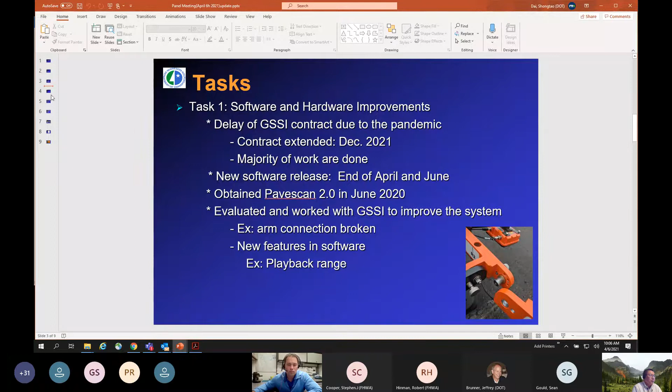For task 2, that's the development of the actual specifications. Like I mentioned before, we drafted up the puck calibration and field data collection procedure last spring, and also produced the training videos based on the 1.0 device. Since we got 2.0, we updated the video portion and the laboratory calibration portion a few weeks ago. The video is uploaded onto the DPS website, and here's the address, so you can go there to view the puck calibration video. We also plan to update the field data collection video and these procedures using the 2.0 device by the end of May. By that time, we should be able to get into the field and collect data.

From a data collection perspective, we continue to hire contractors to collect data for us. This year we are going to try a new program called pay for the data versus pay for the hour. Previously we just paid the contractor by the time spent collecting data for us, but starting this year we're going to tell the contractor to get the equipment by themselves, and we'll pay by the amount of data. We'll give you a spec and a data format spec, and you need to follow this spec to collect the data for us. Then we'll pay for the amount of data you gave us, instead of paying for the hours you spent collecting data. Previously we also loaned them equipment, but from this year we're going to tell them to get equipment themselves, either through rent or by buying it. The encouraging thing is one of our local contractors already bought equipment, so they're playing around with it themselves right now. That's very encouraging to us.

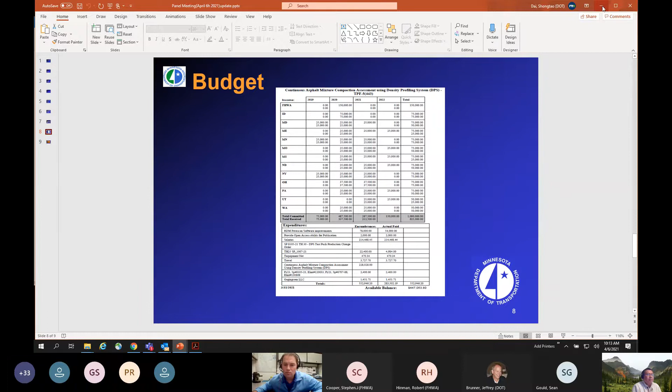Can you hear me all right, Di? Yeah, I can hear you. Okay, yeah.

Kyle asked for a quick update on what Federal Highway has been pursuing. Hopefully most of you know Federal Highway has a support contract with QES to support DPS activities. The last major event they hosted was a DPS peer exchange at TRB last year, and the next activity was to support a DPS implementation planning workshop.

We were putting this on hold for a while as we dealt with the pandemic, but we finally decided to have it virtually. It's now scheduled for April 20th and 21st, and I know a few of the agencies on the call today were invited to that event.

Some of you might remember during the SHRP2 Implementation Assistance Program for R06C, we had an initial implementation planning workshop in early 2014, but at the time it focused on two technologies: the infrared technology, now the paver-mounted thermal profiler, and the DPS technology. But most of that implementation planning was focused on infrared, just because that was a technology ready to go—not so much DPS, although we saw a lot of potential benefits for this technology.

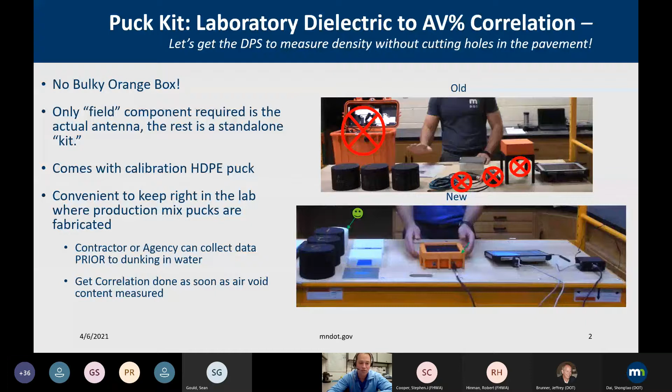I wanted to mention that we get a puck calibration HDPE puck, which is really nice to make sure the sensor is working properly. And it's really convenient to keep right in the lab. What we found, we were able to get our hands on one at the end of last construction season, we just shoot it for the dielectric value before it even gets dunked in the water. So if you have one of these kits on site where the production mix is being made, it's pretty quick to just get your dielectric measurement, and then as soon as you measure the air void content, you have your correlation between dielectric and air voids.

One thing I wanted to mention, we got some feedback from states with bias between lab correlation and what we see in the field. We're looking at numerous things to address this, and one of them that we're on right now is just really the importance of getting a precise height. So please, when you're doing these puck tests, as we say in the fabrication video, what we're advocating right now is to use the gyratory compactor readout as your puck thickness. It's the most accurate, we think, for the height of the puck itself. With a caliper, it's just a little bit too sensitive to pressure, and depending on who's doing it, you can get different readouts. The reason that's important is even as little as a millimeter error is almost a full tenth of a dielectric, which corresponds to a full percent air voids for most mixes. So that's one thing, remembering to use the readout from your gyratory compactor for the height.

In the lower right corner you can see a puck thickness measuring device, and we're going to do some in-house testing with that just to make sure that this gyratory readout is a good way to go. It's also good to have a way of checking to make sure that the gyratory compactors are calibrated, which I believe most states they're required to be. So more to come on that.

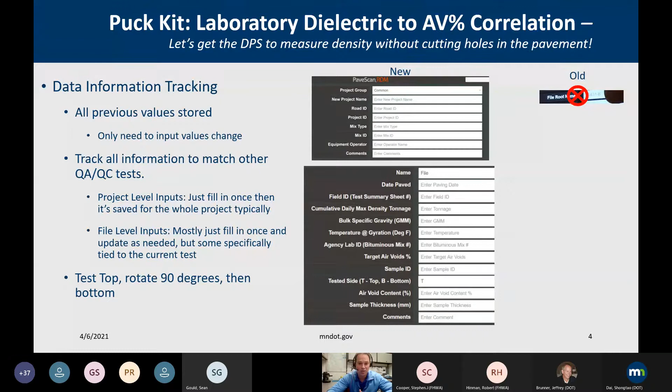Another thing I'll mention right now is we're advocating doing a top, rotate 90 degrees, and bottom test with the puck, just to make sure that there's no effects of where you are on the puck in case there's some sort of a compaction gradient within the sample itself. But again, that's in the video, so keep your eye out for that.

Also, one thing we found with this new puck testing kit, for those of you who did the first 1.0 version, you kind of had to be a ninja a little bit with the samples and make sure you got everything flipped and switched and changed within a certain 5-second time window, and that of course leaves a lot of room for error. With this new puck testing kit, it's very simple.

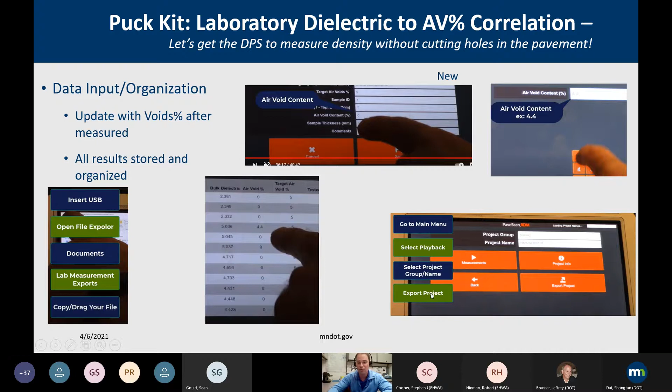And again, no more executables on the processing, you have the results already to go. In this case, once you go into your specific test, you just take the calibration results for a linear correlation between dielectric and air voids, and you should be ready to go with your field testing kit.

This can either be done directly in the software to get the correlation coefficients, or we will provide a little template we've built in Excel, where basically if it's green, that means you can paste data.

Again, it's just a simple copy and paste from the exported file that contains all the information you input for that specific project, which we think is a good way to make sure we're tracking everything right.

But in this case, you guys don't all get a car, I'm sorry, but you do get a puck testing kit if you're part of the pooled fund. The only thing the vendor asked is that you share all the data that you collect.

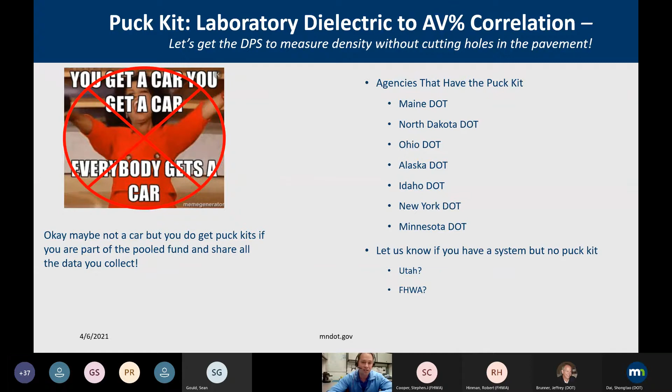Lastly, I wanted to summarize some thoughts and then play a little bit of the training video, and this is where you can go for more detailed information.

Please give us feedback, because we have Camtasia software that allows us to do different editing with our training video, but you can jump to different spots. If you're more interested in the test itself, you can do that.

Just in general with this puck testing kit, we think it's a lot more user-friendly. One way to say it is there's less opportunity to screw it up. And then, of course, you get real-time feedback, which is important.

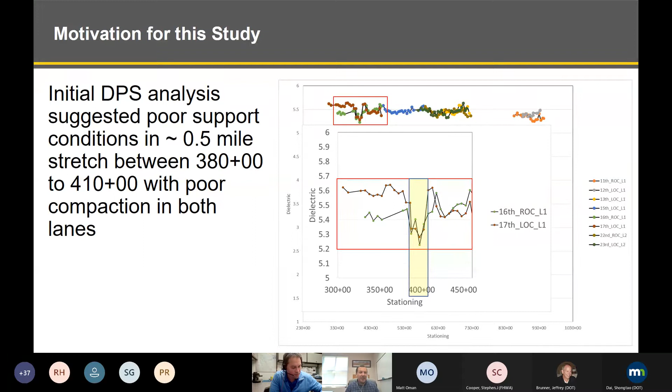Again, I wanted to emphasize the advantage of not needing full coverage. It has to be at least something that can show us that the density changes with distance, and that's something we know we want to take advantage of using this type of technology.

Again, as I mentioned, this was also corroborated later on by checking all the different density results, and what I said before, the standard QA practice did not capture this low density spot, and that's something we can take advantage of at this point. We can take action immediately and come up with solutions right away, instead of waiting a couple of days if you're lucky to find that was a defective area.

With regards to what we're planning to do with this project, the objective is to further advance and improve DPS technology, taking advantage of AASHTO specifications developments. NCAT has extensive experience with equipment and operator certifications, specifically the profile certification that we currently have at our test track facility. The idea is also to use that DPS technology for data collection and analysis of different methods.

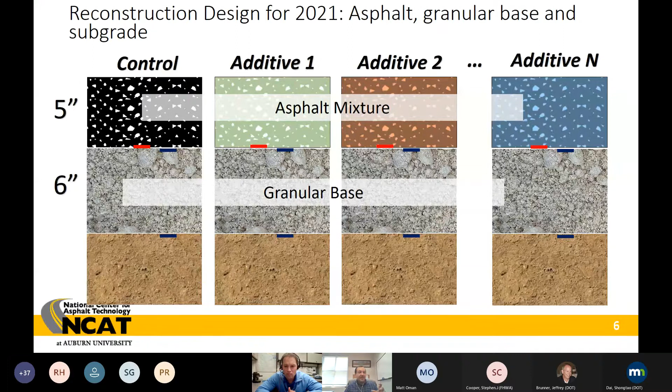By the way, these are going to be placed in one lift. So we're going to have 5 inches all the way down to 1 inch at the track. We're going to be able to separate, again, thin and thick layers at the track as well.

We already started the process of building or creating these slabs. We can do 1 slab per day. The process at the beginning is going to take a few slabs. We're going to test extreme values in regards to thickness and density.

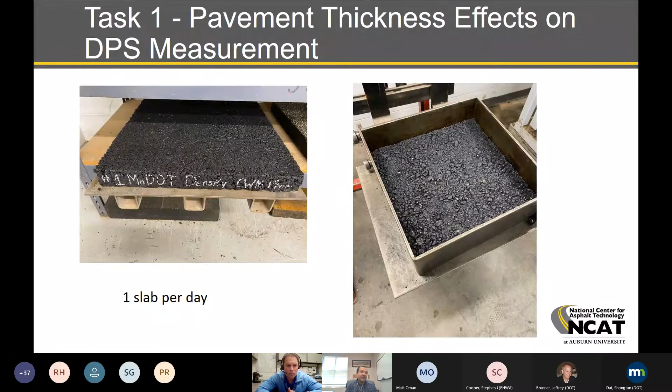As you can see here, the lab testing plan was to have 2 different mixes. One is a 9.5 millimeter nominal maximum size, and the other one is a 19 millimeter nominal maximum size. The plan at the beginning was to have 4 different density levels ranging from 88 to 97% of GMM, but at this point we're going to try to start with extreme values from 88% to 97%.

We're going to have those 2 mixes with slabs ranging from 1 inch to 3 inches for the 9.5 millimeter, and a minimum of 2 inches to 4 inches for the 19 millimeter, basically trying to comply with the thickness to nominal maximum size ratio. So we don't want to go too low, since it's going to be difficult to compact, or we don't want to go too high, which may come up with different effects.

So that's pretty much task 1. Task 2 has to deal with equipment and operator certification, and here we're going to try to reproduce what we have in place with regards to profiling systems.

The idea is to come up with a parallel practice to AASHTO R 56-14, and develop all the different repeatability and accuracy scores, or something similar.

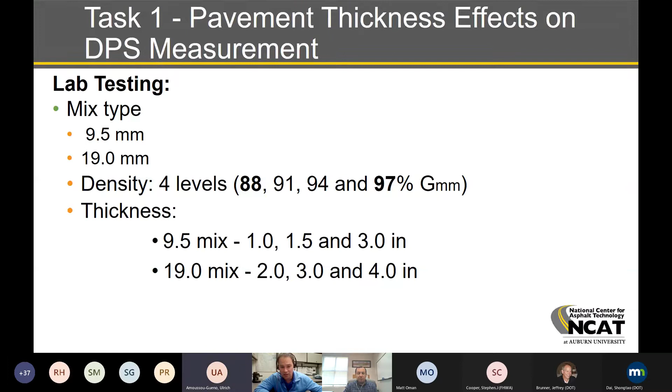Yeah, and another thing to add is that we do have some data collected that hasn't been analyzed yet for the effect of underlying layer at MnROAD, where a 3-inch lift was gradually changed to nothing at a transition zone. So hopefully we'll be able to provide a little insight to support Dr. Leiva's effort there too.

All right, so continuing with task 3. Again, the plan is to use those same two mix types, a 9.5 and 19 millimeter, and also use the same density levels ranging from 88 to 97%. One question I wanted to ask the participants is whether we may want to use Corelock from the beginning.

As Kyle was mentioning before, we plan to measure the dielectric before dunking those samples in water. But if we were to use Corelock, we may be able to preserve that or avoid adding water to the pucks. So that's something we're probably going to do, using Corelock for the samples that we're going to distribute among all the different labs. Of course, we want to know the specific gravity of those pucks, but at the same time, we don't want to add water to those. So I think at this point, Corelock is the way to go.

Later on, we're going to move on to field testing, and we're going to come back with several sections where we take cores and compare the effect of moving from lab compacted samples to cores. We already have an idea based on conversations and meetings with MnDOT that there's an effect. We'd like to see what the effect is on those statements when we move from lab compacted samples to cores.

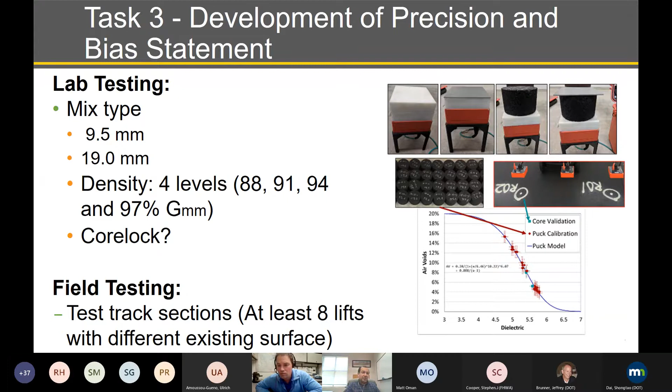At the end, as a summary, I wanted to share the deliverables we plan to provide to MnDOT for this pooled fund study. I think the bias and precision statements are important if we want an idea of the overall variability of the equipment when evaluating lab compacted samples.

We're going to be providing support and evaluation of testing variables in the lab and in the field. All those results are going to be available for you guys, and we'll continue sharing those results. Equipment and operator certification and standard practice.

We have a couple of students helping us provide standalone software. Basically in MATLAB, we should be able to create standalone software similar to what we have for inertial profilers. So once a contractor or vendor comes with a new DPS technology, we should be able to input all those different profiles, compare them to the baseline profile, and there has to be a cross correlation among the different profiles. Then we should be able to come up with a score and compare that against the standard or criteria set from this study.

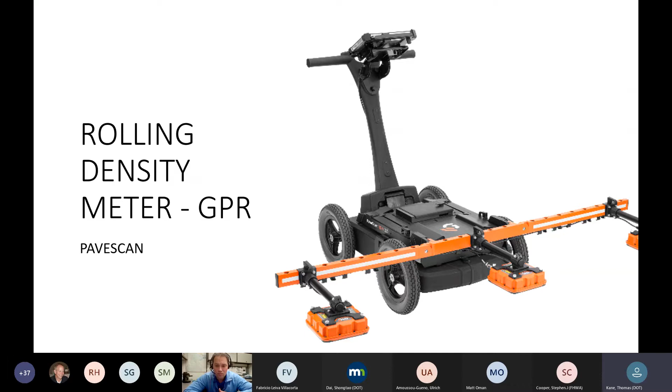Some of these slides will not be news to anybody on this meeting, but I left them in because I think it was important to understand how we're promoting it within the region, or explaining it within our regions of the state.

I felt like we had to talk about the RDM in terms of what we're doing now for quality assurance testing for density monitoring. The cores are obviously the gold standard, but they generate problems from destructive testing to trying to get the tests performed, and we're still getting them infrequently. The gauge lines up a lot closer to the RDM, but I'm really trying to get these guys to appreciate what that data from the RDM can do compared to the gauge.

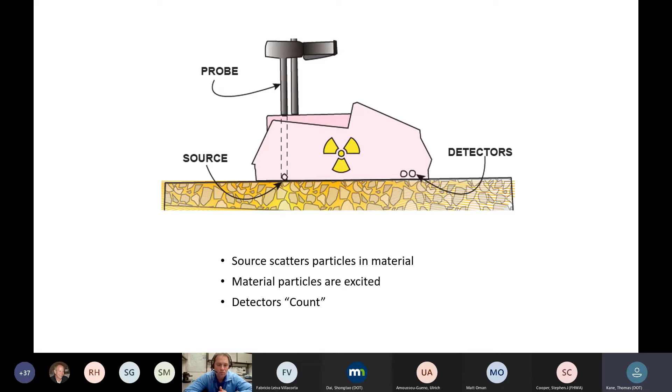Obviously it's a similar technology with a source and a detection, and we just spoke about this in the last presentation with some interference from below, but the results from the gauge - the lower lifts do contribute to those results.

There are other problems with the gauge too. Right now, all of our gauge data is generated on a paper form, which means somebody's doing math in the background to figure out our running averages. There's always the ability for a guy to move a gauge reading to the left or right. So I really want to introduce to some of our construction staff that while everybody's familiar with the gauge, it has its limitations and its own set of issues.

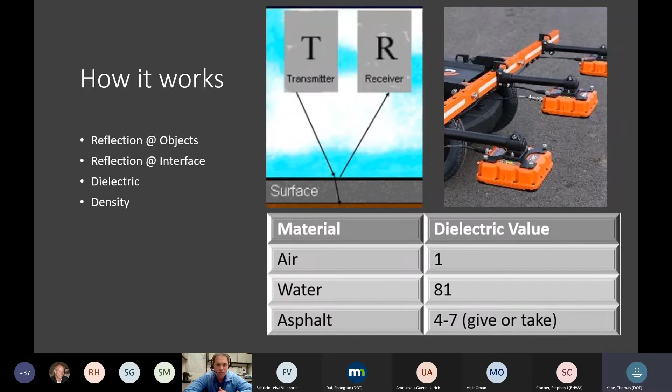Really basic primer for these guys, just to understand that much like the nuke gauge, this is a transmitter receiver type scenario, really basic right there.

Rolling right into that thought, this is, I think, what grabs a lot of contractors and the engineer's attention, is that this is the result that we're getting from rolling over it. It's not going to look like that black and white kind of Rorschach test of interpretation. You get a color, you get a yes or no. This is something that I think a lot of the EICs that we were out with this year were really taken by.

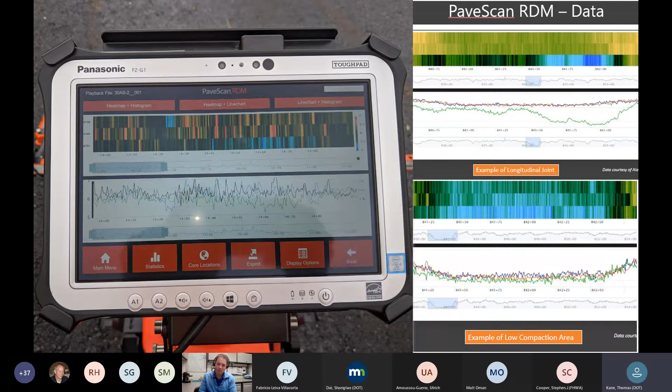And this is something that you can really use to kind of promote the concept. And I'll say that from both our engineers' perspective, our regional materials guys are very progressive. And even a lot of the contractors, they see this, they see the bright colors, and I swear to you, it almost sells itself. There's a lot of interest in where we're at.

Kind of jumping ahead of how we put it into contracts this year, like I said, we ended up doing 3 last year. We took a range. Let me start over. This got inserted into 2 different contracting mechanisms, but our process was still the same.

We still asked for the gyratory specimens compacted at anywhere from 86 to 98. I don't think we necessarily needed to be doing that, but for the first year to get this in a contract and get some exposure to it, we figured why not ask for a little bit more.

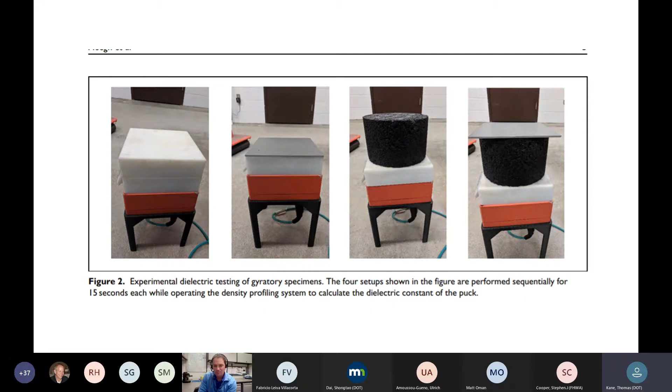Going through with the puck kit, obviously the first time, but this slide, when I presented it to our regional staff, was to basically promote that there is a measurement going on, that those colors that you see on the screen are being derived from something. They don't typically see this, but it's important, I think, for them to know that there is a tie-in.

So here's kind of the first slide of data. This was our first project, taken outside of Utica. First experiment with using the puck measurements, we had some fliers. The slide to your left shows all the data that we had. The slide to the right shows it excluding those 4 points. I really can't explain those 4 points.

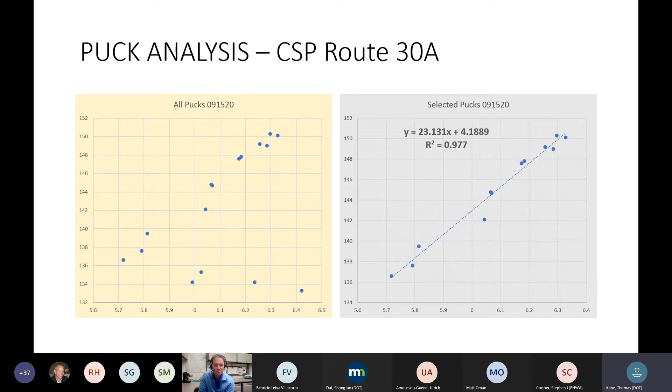This is going to be a common theme with some of the other data that I'm going to present today. I'm not really sure why it happened, but it's pretty clear that there was a flier there for whatever reason. But excluding it, we really get a good correlation with those pucks.

When we did our data collection, just a couple of things: obviously, we did all of our cores with the center sensor. However, we did 2 passes at 1, 3, 5, 7, 9, and 11 plus or minus down the core. So we're getting 6 lines of data, and we'll talk about that a little bit more in a second.

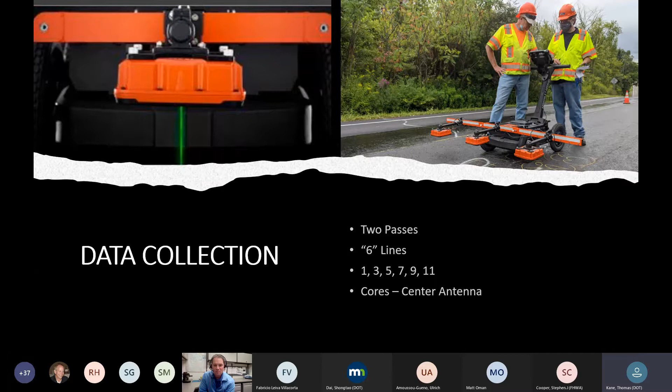But here's the beginning of what the data was. And the core is always going to be shown in pink, and we'll show that on the graphs as well. And then the blue will be the radar information, the orange, the nuke gauge.

I still have everybody? Yep. Sorry about that. Yeah, we're here. Yep.

On this first project, we also had some binder data. The binder data, as you can see here under this delta RDM, we were a little bit all over the place on that first day of data.

I think some of our data may have been skewed by minor production changes at the plant. This specification that we ran on these contracts ran in the background.

So meaning this was just a shadow program to collect data. Their pay and their incentive payments are still based on volumetrics. So there still was an incentive, even though we asked them to not move the targets. Obviously, there's a financial incentive for them to ensure that they are going to get the most incentive payment they can. So there were slight movements. I don't know if that played a role here, but it is a possibility.

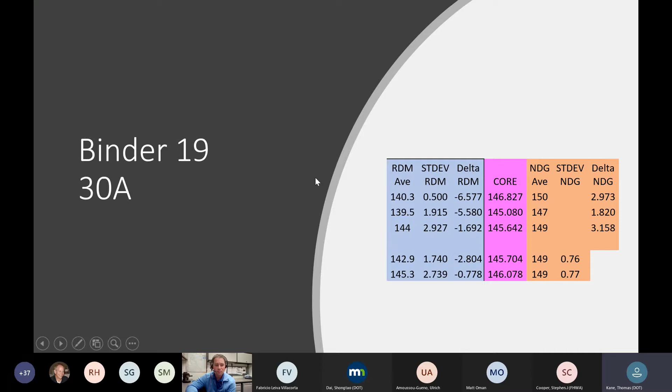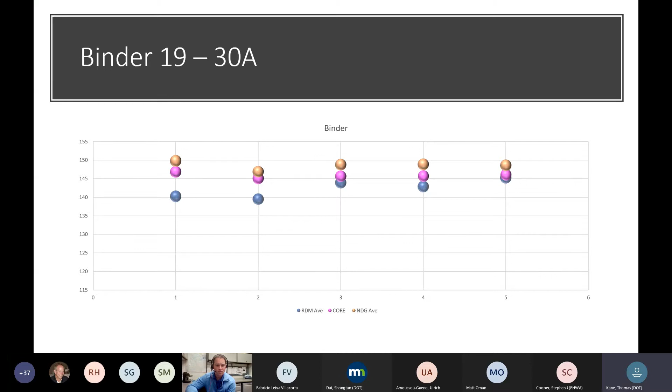Graphically, you can kind of see this a little differently. Pretty tight though. Our binder data actually looked reasonable, particularly for our first day, our first project.

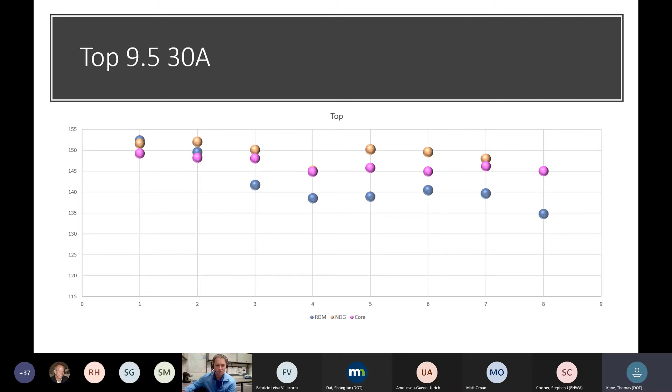145 on our cores, so this is significant. It does seem to trend, as you can see with the data a little bit. The RDM data seems to be consistently lower. The nuke gauge and the cores obviously are a little bit closer, but whatever the reason was here, it was pretty consistent. The longitudinal cores were really the interesting one on this first project.

I highlighted the ones in red where we see the delta RDM, and I apologize, it's a lot of data. I don't expect everybody to really be able to take it all in, but we had some really poor values on these.

The standard deviation was kind of all over the place early on. Seemed to kind of come down as you get down to the bottom of the page here. It seems like we've kind of got them together, a little bit tighter. Our deltas were looking pretty good, but then we would occasionally still get these flyers.

It's important to know too that we also had some big deltas with the nuke gauge on the longitudinal joint as well. I think as we move to this season's work, the longitudinal cores is something that we're going to look a lot more at. This was the only project where we had longitudinal cores and a longitudinal measurement for, but there's a lot here to unpack.

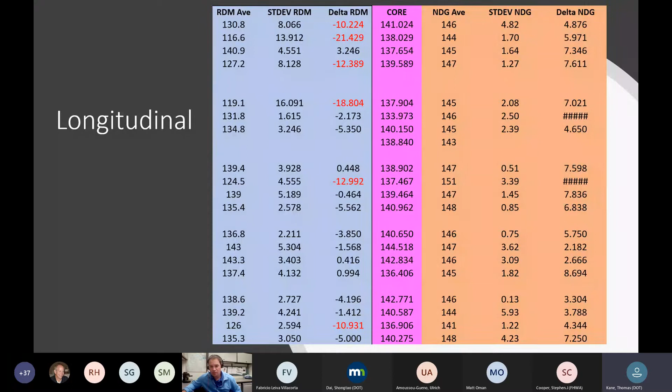Tom, question. So did you longitudinal join the core? Did you core through the joint, or did you take a little bit away from joint? It's a little bit away. So we're primarily using wedge joints, so we're trying to get the meaty part of that wedge. Okay, similar to ours. Yep, okay.

Just more scatter. I think when you plot it, things kind of pop up, but you definitely see that we're a little more variable, definitely early on.

But the one thing I want to keep coming back to is that this was our first shot, our first project out of the gate. I'd like to think of it, I mean, I had 2 little kids. Christmas morning, there's nobody stopping to read instructions. Everybody just wants to go out and kind of take it for a spin. And we definitely learned some things the hard way.

So I think you'll see our data accuracy and our delivery a little bit better as we go on here. The next project, we got considerably better numbers on. This one was a small vendor placed job out in the Buffalo area.

If you look here at the averages, and I should say the differences, pretty close. 2 pounds off, 3 pounds off, 1 pound off, 2 pounds off, really getting good numbers. And really, I thought what was interesting here is how close the standard deviation.

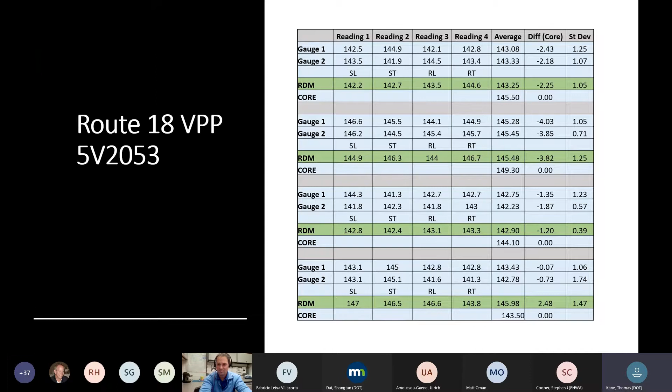Another graphical look at where that data is. I find it funny on day 2 that the core was much higher than both the RDM and the gauge. So I don't have an answer for that. I think it's just one of those things. Maybe that core was a little wetter when we measured it. Not quite sure.

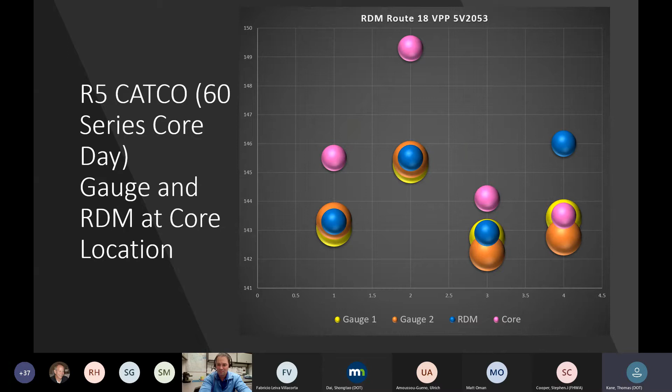Kyle, Thomas, we got a couple questions in the chat. Sure, do you want to read them? Sure. How often did you do a puck test calibration of the RDM during the projects?

So we did the puck calibration early on, and then depending on if we had some changes or if we had some time on rain days, we would do another one during.

And then the next question: are there any time constraints between collecting field samples and fabricating pucks in the lab, i.e. within 24 hours, 1 week, etc.? So we asked to get this mix prior, that was part of the reason we had it in the note.

This is something we're going to set up for our producers and contractors again this year, because we put a note in the contract that they have to make these pucks ahead of time. These are typically commonly used mixes that they have off the shelf. So if they know they're going to be working on a GPR project at the end of June and they're running mix early June, we'll work together and have them make the mix ahead of time.

We'll take those samples, transport them back to advanced testing. Or in our case, as we get our system in shortly, we can test them as well and get those numbers. We try to get that early on because I think that goes a long way with educating the contractor, so they know they'll get meaningful feedback from the unit from day one. They don't have to worry about it going out after the fact.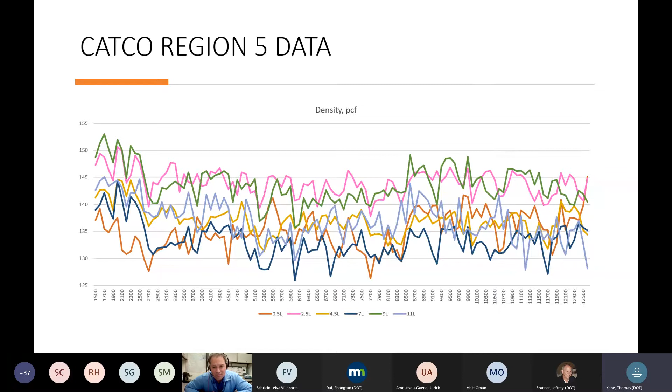Going back to that picture of Christmas morning when everybody's ripping things open and nobody's reading the instructions, we didn't do a swerve test, so we didn't necessarily see this bias right away. We saw similar results, probably worse results, in the Utica project, our first one out. We didn't really know what was causing it. It was that arm issue, already referred to earlier in one of the earlier presentations. The slight variation of where those arms were sitting on the unit was causing a bias in the data.

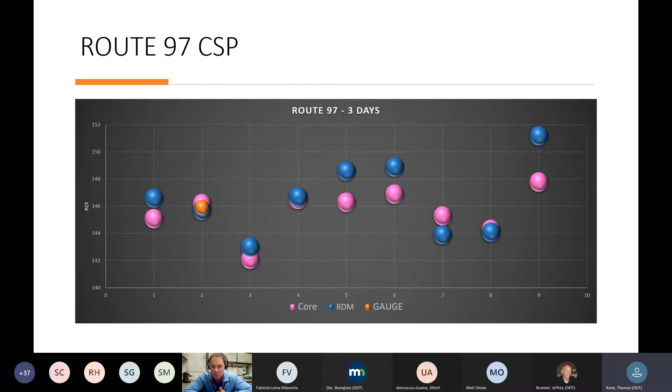Route 97, this was another job, our third job, the last one we were able to get in that year. This was down in the Binghamton area. Really good, we were very tight. I don't have a lot of gauge readings on this particular day, but the one I do have lined up perfectly with both the core and the RDM results. Really, really happy with how this particular project showed in terms of accuracy.

The only downside was generating this data in a format you could read. Advanced testing would produce a lot of work for us and send us a lot of files, but it was still a lot of manual manipulation of the data in order to really see where we fell. Even the core data we would do as part of our normal QA testing, taking that in, getting it back from a second or third source, bringing that in and matching it back up to the advanced testing data - this is what took some time, and you couldn't be distracted when going through this. So my point is, we didn't really know we were doing this well out on 97 until after the fact.

A couple more of the longitudinal scans from this project, where we have a high degree of confidence in the accuracy, we could really see an issue out on that shoulder joint. A lot of these roads, and I don't particularly remember the work history on this one, had partial depth shoulders, or some issue out there on the edge. The density clearly lagged there, and it stayed consistent throughout the job.

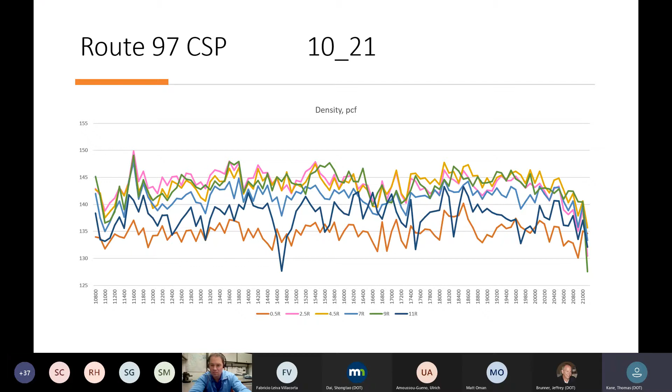So this is data that we could get back right away to the contractor. They'd be able to get that feedback right away. I don't know if that conversation went on because I wasn't there during construction on this one, but still, we can go back, we can see what we kind of already intuitively know, that our lowest density spots are going to be out there at that longitudinal joint and at the shoulder's edge.

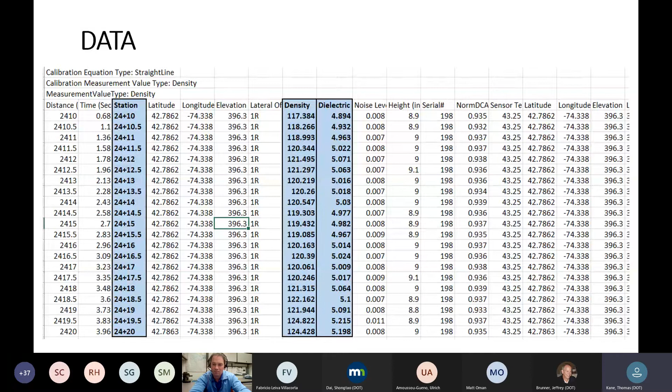I bring this back up, the data output, because this is something that we talk about with our EICs quite regularly. What the hell do I do with all this? What does all this mean? This is the data that we get from Advanced. Now we have to make our decisions on how we roll it up and what we're going to do with it. We're getting tons and tons of data. People want to know, what does it mean? Take some time to do that manual outputting.

But I do think that this is something as an agency, I think we're going to have a spec that's going to look at some sort of statistical output or statistical analysis from all that data.

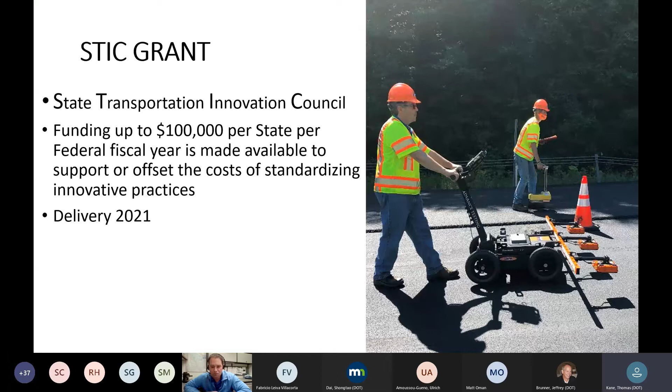So I said that Advanced did our testing for us last year. They bought the cart. They see some promise with the technology. We're also buying ours right now with the STIC grant. The bid's getting open shortly.

And this isn't a plug just because the MnDOT guys are on here today, but this YouTube channel for the guys first going out, really, really good. Walks you through everything. It's going to save us as an agency a lot of time because we don't have to make these training materials, and quite honestly, they won't be to this quality.

2021, I have a list of projects. Will be on the last slide, but we're really trying to identify what our accuracy issue is. Try to identify the limitations. We talked about something as heavy trafficked areas and the contractors turning around to pave back, match up in a lane, and we still got a guy pushing his cart twice up and down the roadway with traffic backing up. Little things like that.

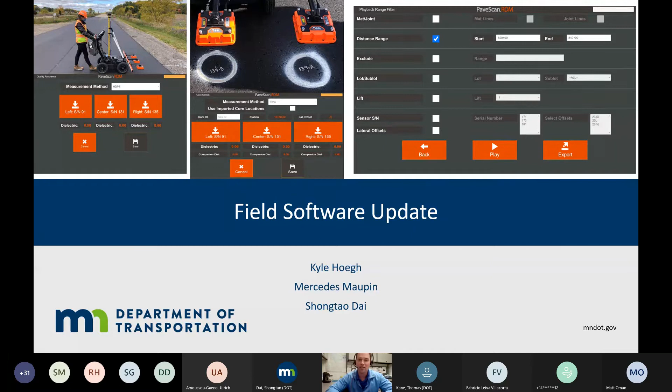All three are significant, but the one I'm most excited about is the on-site playback range filter. This addresses being able to take all this collected data and make it easy to tell the contractor, or whoever's asking—maybe the project inspector—how the compaction is looking today. That's what this playback range filter is designed to address.

Let's start with what we're calling the quality assurance module. It's mostly designed to make sure your sensors are working correctly, so you don't run into situations where you've collected a lot of data and have a validation problem caused by sensor bias itself. The raw data you're collecting needs to be of the highest quality, and that's what this module tests. When you use this new module, you select quality assurance to let the software know it's categorized as quality assurance check data. One feature is that you can still include it with your field analysis, but instead of wading through all the data to determine what's your quality assurance data, it's placed in a specific category—we'll see that in more detail later.

The three types of quality assurance checks the software currently allows are: high density polyethylene, which I don't currently recommend—it's a good gross estimate of whether your sensors are working properly, but it doesn't represent asphalt pavement. You'll want to do, at least at the beginning and end each time you collect data—and we do it more often—either a repeat line test, running all three sensors over the same line, or a swerve data collection, collecting a significant amount of the population of data, where you should get similar results for the three different sensors. Again, you can include the swerve or repeat line data with your field measurements as well.

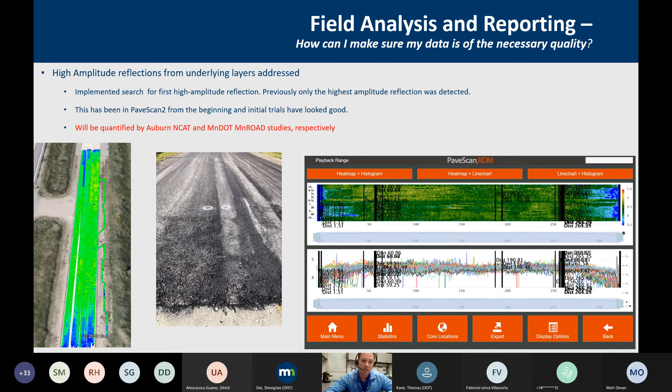So with the height of the antenna relative to the surface, you get an indication here, and this is really important for debugging purposes. So if you do start to get an issue with your sensor, you have this height of the antenna that's exported. This was very useful when Minnesota, Ohio, and New York had the issue with the sagging arms.

We were able to catch it relatively early and make a correction, both mechanically and with the software. In general, a lot of these improvements, especially testing the quality of the dielectric, are designed to give you as real-time a result as possible, with as much confidence as possible to say this system is not working the way it's supposed to. Trust me, vendors would prefer you tell them their system isn't working properly sooner rather than later. So please, when you're out there with the system, even if you missed something obvious, that's the best kind of fix to do. But if something's off with your system, give us a call or the vendor a call to debug and get your system back up and running.

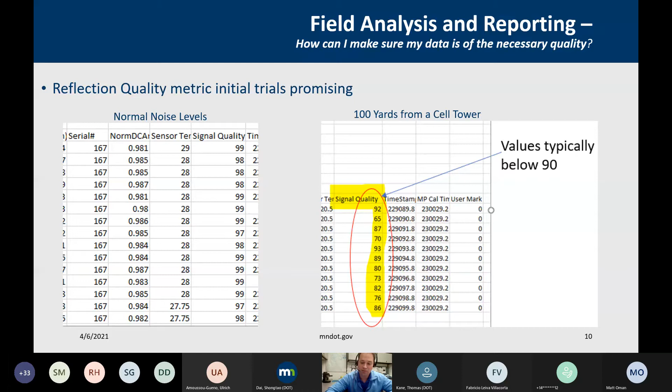The reflection quality metric is something new that's supposed to help if there's ambient noise, such as at a cell tower. This is outputted as a signal quality typically close to 100. But as you see here, if you go close to a cell tower, that signal quality measure starts to drop. This might be something we want to monitor to make sure we're identifying locations where there's too much ambient noise to get an accurate dielectric measurement. That's currently implemented in the new version of the software.

The next general direction where there's improvement with the software is with validation core locations. What we're trying to accomplish with our cores is to make sure the correlation we develop between our dielectric measurement from the DPS in the lab and what we use to convert that to actual air voids is good. So it's important to get a very accurate dielectric measurement, catalog correctly the exact location of the core, and most importantly, get quality data at that core.

This distance approach, what I'm calling a hybrid mode, is what we're currently recommending, where you have basically the best of both worlds. Before, we had been doing static measurements directly over the core, or distance-controlled measurements leading up to and past the core. Ohio, Alaska, Minnesota, and maybe some other states saw better results for whatever reason with the distance mode. But the issue is that you're taking measurements off of the core location.

So with this hybrid approach, you start basically at the diameter, at one end of the core, and it's still distance controlled, but at a much higher frequency. So when you collect across that 6-inch diameter core, you're getting multiple measurements to make sure you get a highly accurate dielectric at that core location. The other nice part about this software is that you get that readout right away based on which sensor you're actually using at the core.

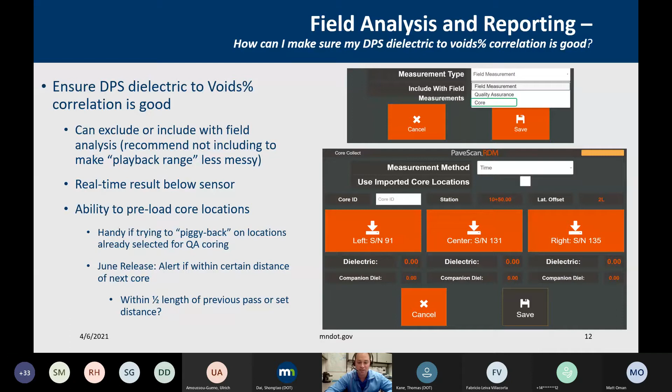Another nice feature with the core validation is that, similar to the quality assurance, it's a completely separate set. So you get a live display of all your core locations with all the corresponding information, and as soon as you have a percent voids result for each of those core locations, then you can go into the actual software and input it.

The other part is you can actually export the results to Excel, and this comes in very handy to be able to just take the dielectric and percent voids and directly copy and paste them into your location where you did your puck calibration or your puck correlation with voids, to see if it's actually proving the accuracy or inaccuracy of your correlation.

I'll actually be presenting the next topic too, and I'd like to give us time to have discussion on some of the more big picture things. So I think I'll jump right into the example project here, to keep us on time and allow us enough time to really have good discussion with each other.

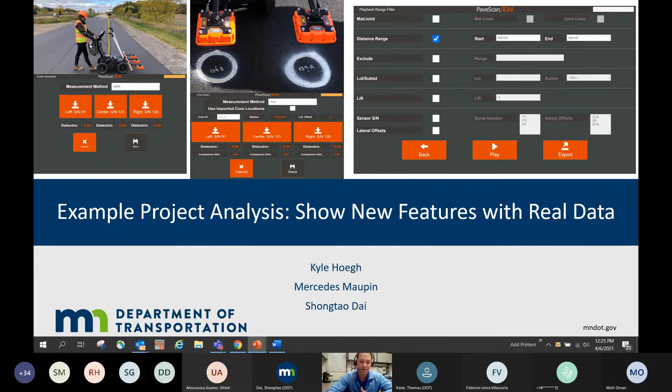Basically, the purpose here is to take these new features and show you guys what it actually does for you with real data. So we're going to start with what the module is called - the quality assurance check - but what it's doing is trying to make sure your sensors are working properly.

I'm going to look at it from the lens of a single day, August 18th, that we collected on Highway 30 in Minnesota, and use that data to explain what each of these features are doing for us. Then I'll take some data from other states that they've sent me, as well as some other projects we've done at MnDOT, to explain some of the more extreme cases of why we do these different things with our on-site software.

So what you see here is the real-time dielectrics, and what's nice about this is you can see right away that they're all within a reasonable limit of each other. We're hoping that they're all within 0.08 of the global median, and you can feel warm and fuzzy about your system and your data collection when you see something like this with your first swerve test or line test of the day. This is also exported in terms of difference from the global median on an on-site measurements tab that you can get to.

And this will all be part of our videos that we create for all these updates that we're planning on releasing in June.

The other thing you can do with this export is once you're done with your data quality tests for the day, you can easily export it and show where they are relative to your acceptable line.

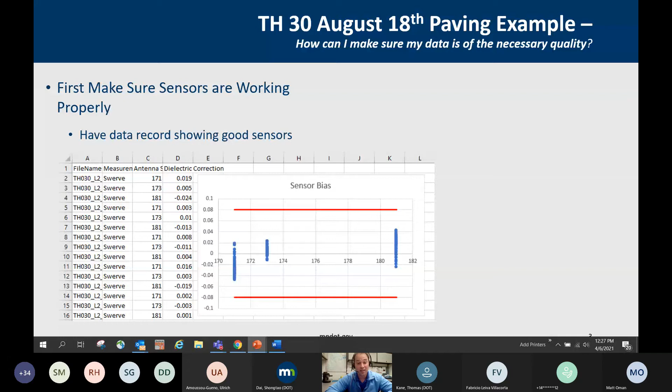This is the results from the Highway 30 August 18th paving example, where you can see there was a little bit of bias with sensor 181, where it was a little high, and a little bit of bias with sensor 171. But at those magnitudes, you're really happy with that, no matter which sensor is on that spot on the pavement, it's giving you a good, accurate result. This is also a good way of cataloging the quality of your sensors.

As we said, I'm also going to give some examples of why we have these different on-site responses. As Thomas mentioned in his presentation, on their initial project, while they were still kicking the tires and excited to get out there, they were seeing a bias with one of their sensors.

They didn't end up doing the quality assurance test, but I took one of their locations where the left and right sensor were both 2 feet on each side of the longitudinal joint, but still had a 0.3 different dielectric. So it wasn't a swerve test, and maybe the right sensor actually was 0.3 lower than the left based on the mat itself, but probably not.

I use this as an example to say, okay, Thomas would have went out there, or whoever was collecting the data, and they would have gotten a pop-up that says data quality is out of range, which would have saved some of the trouble with going through the validations with the cores and the nuclear gauge and finding it out that way. This is something where you can get that feedback as soon as you perform this sensor validation testing.

The other thing, as I mentioned earlier, is it gives you the confidence to call the vendor and report it. Maybe it's something simple, maybe you just have to recalibrate with the metal plate, but it really can save you a big headache.

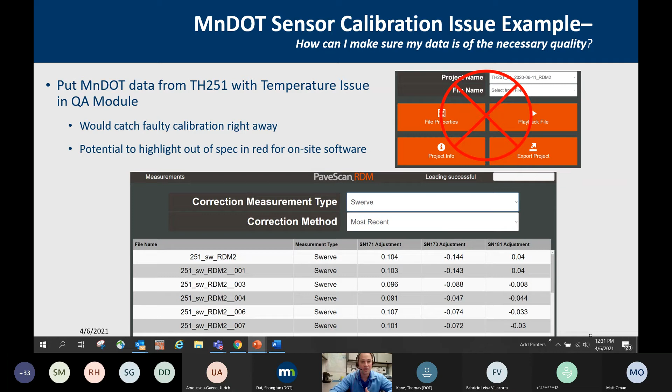This is the same exact export that we showed for Highway 30, just a higher scale because the sensors were more out of range. You can see this simple export of all the different correction factors for the different sensor numbers shows you the issue you're having with a bias in your sensor. That's something that's directly output as part of the new software package.

But I feel like I'm focusing too much on the instances where the software is bad. The fact is, once we got our temperature correction, we ran over 60 miles of swerve testing, and very few percent of the time did we see any of the sensors acting outside of the 0.08 acceptable range. 93% for sensor 171, 96% was within range for 173, and 94% were within range for 181. So the key is to be able to catch these flyers when your sensors are not working within range, and that's the goal with this quality assurance module.

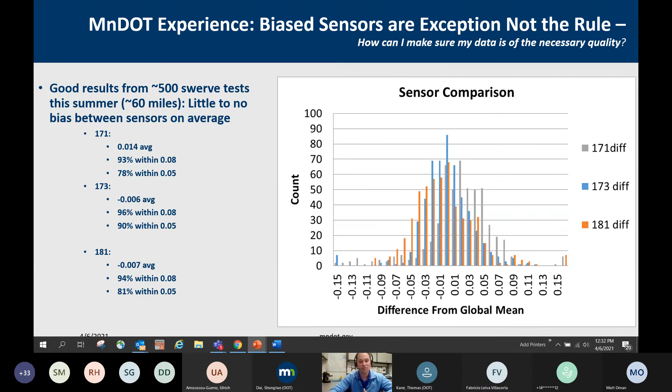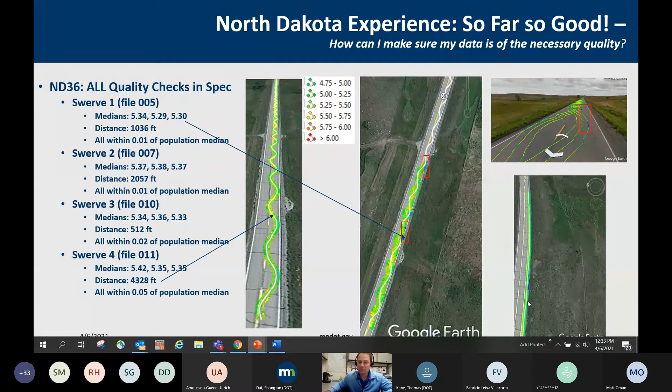We also looked at North Dakota's Route 36 data, and again saw really good results showing the quality of their sensors on that project, including a really long swerve. I also wanted to show an example where, because they did the down and back swerve with different sensors on different sides of the pavement, even though it looks like on the right side they had some lower spots, the swerve still detected that the sensors were working properly. When you map along that edge where it was low, you see the low density. These trends are only possible to see when your sensors are unbiased, and that's what we're doing with this quality assurance check.

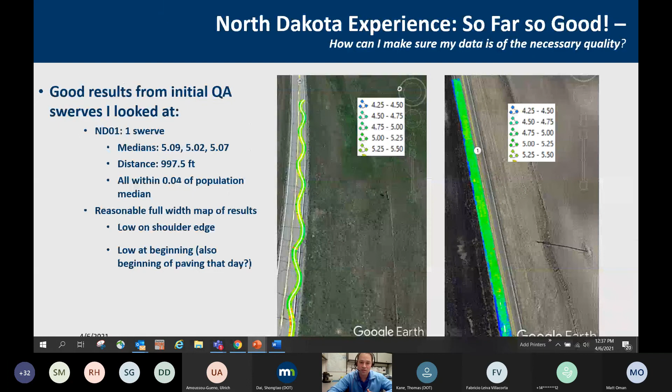Is there any other questions, Di? Not yet, not so far.

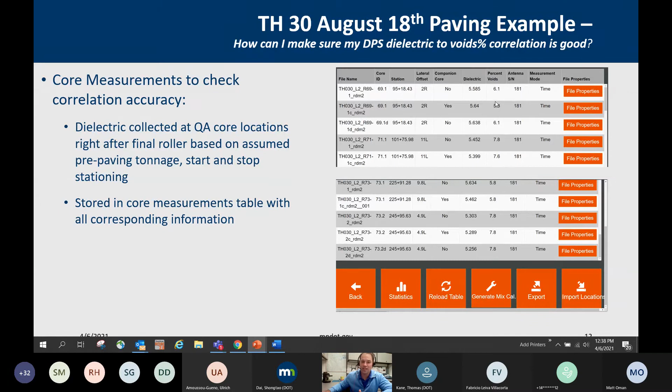Okay, so with our core measurements check, we also have that same real-time table, which is nice because now you have all the information associated. You input your core ID, the station it's located, the lateral offset, and as soon as you have the percent voids result, you have your validation data point. This can also be exported, which is important because now it's as simple as copy and paste back into your Excel file. So if you remember, we pasted our puck results down in the lower left to create our correlation. Now we can paste our core results to determine if our correlation is good or not.

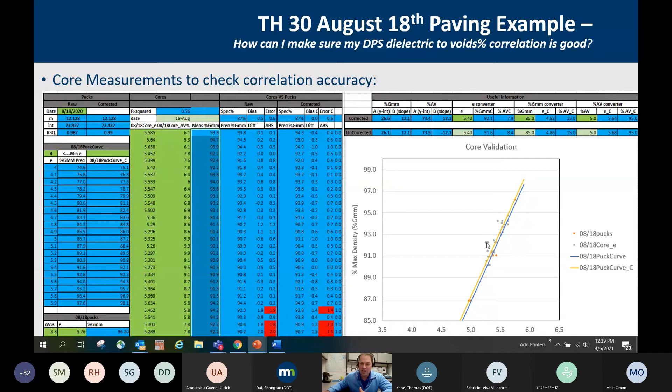When we're looking at the relationship between the blue line, which is based on the pucks, we can compare that to what we're seeing with the cores, which are these gray dots. What you see here is that, generally speaking, looking at the difference from predicted versus actually measured, we're within 1% voids for the majority of these core validation positions, until we get closer to the end, where we have upwards of 2% higher than predicted. This is color coded so that if it's over 1.2% different, we color code it red, which gives us an indication that these data points are not accurately reflected by our prediction.

So looking at the data here, there actually was a change in mix that didn't trigger another correlation because it was only a 3% change. One working theory here as to what caused those couple data points to move off the line is the difference in dielectric properties of this Northwood half-inch rock versus the Glenville half-inch rock - that's actually what caused the need for the recalibration.

Because of observations like this, what we're planning on doing for this next construction season, especially considering now that we have our Puck 2.0 kit that we can keep right in the contractor's lab, is just shoot for dielectric of all the samples fabricated throughout the day. The nice part is they have to fabricate those samples every 1,000 tons anyway in Minnesota, and different states have similar procedures. So we might as well get a dielectric value and monitor it, instead of trying to guess what type of changes in the mix will cause a shift in our curve - we can actually just measure it. I suspect if we start measuring this, and other states start measuring this, we'll find that this dielectric check might be a pretty good quality check on the mix itself.

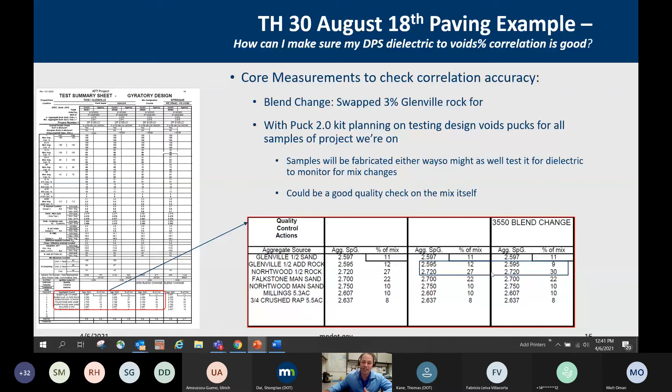So that is to say, if there's no reported change in the mix, but you see a spike or a decrease in your dielectric, that could be a good indicator that something with your mix is changing, whether it's a wet aggregate source or whatever it is. I gave this example because it speaks to the importance of having a good handle on what exactly causes a change in our relationship between dielectric and air voids. With this new Puck kit, I think we're in a good spot to monitor this, not just day by day like in this Highway 30 example, but sample by sample.

This brings us into the more fun part, in my opinion. So what we've done so far is made sure our raw data is of high enough quality, and our correlation from dielectric to voids or percent compaction is of high enough quality. Once you have that, you have a continuous assessment of the placed relative compaction of your mat, real time right behind the final roller.

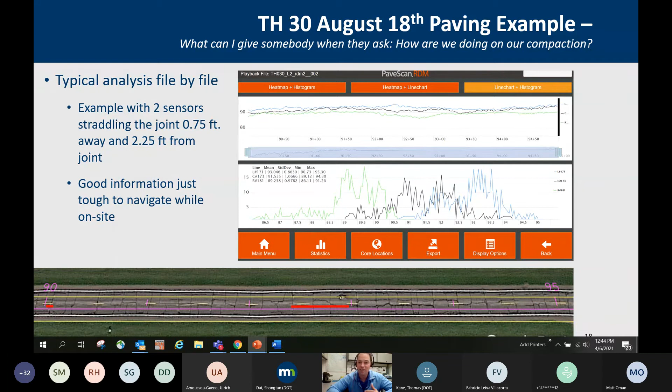This is still something you can get with file by file analysis. But for anyone who's used this software, it's very hard to go file by file when someone asks you, something happened at station 225 plus 30, can you look up what the DPS is telling me there? It's not really well set up until now to answer that question. That's where this playback range is really critical and a really powerful tool.

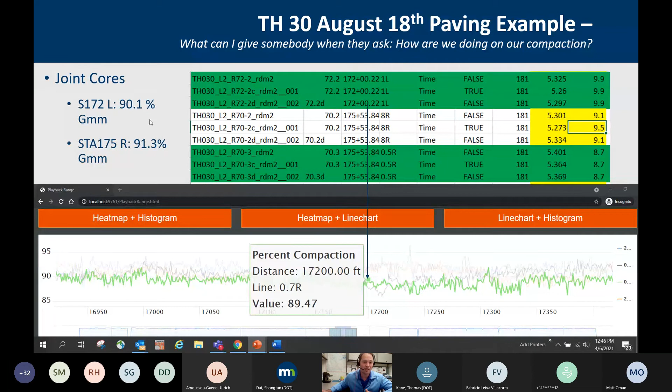By zooming in on the stationing corresponding to one of the cores, at 172 plus 00, we saw an 89.47 value corresponding to the DPS measurement, and the core result showing up at 90.1%. So obviously one of the better spots for that section of pavement. Then at station 175, we got a 91.3 on the other side, which again corresponded to one of the better spots of the pavement.

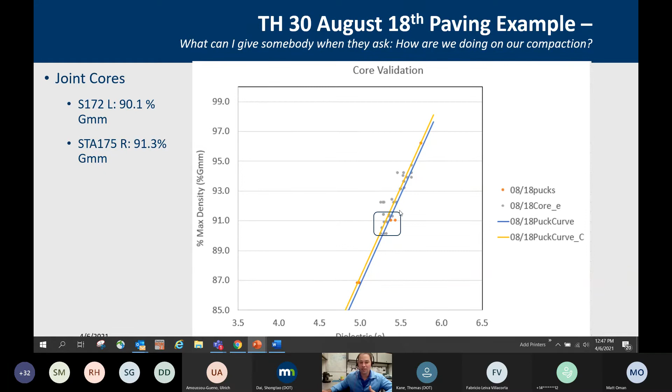So these are the only cores we have for the entire day on that joint. And to refresh your memory, there were lots of different locations that were significantly lower on that project, but that's basically what we're stuck with given our current coring procedure. Once we see that, we can go back to our calibration and remember that we do have dielectric and percent max density results there, so we can feel pretty confident in our correlation at that point.

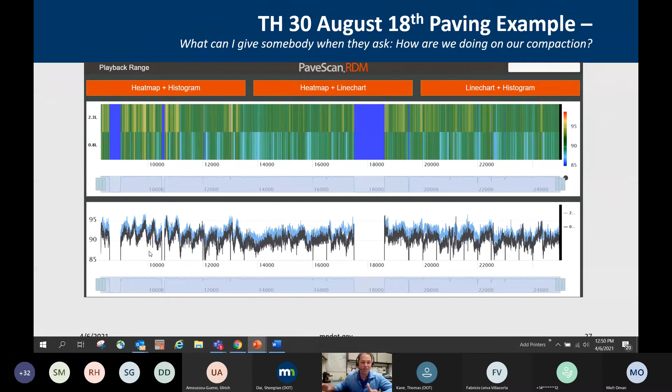This is another example showing: if you output what you see, in black is within 0.8 feet of the joint, and the blue is 2.3 feet away from the joint. I exported this to show the group that you really see what look to be noisy trends when you view it at a 3-mile width. But when you zoom in on these areas, they're legitimate changes in the density being observed by this technology. It's a really powerful way to see how your mat is changing in compaction at multiple offsets due to various construction practices and maybe some underlying layer effects.

With this playback range, to me, this defect export becomes really powerful too, because now you can see beyond a reasonable doubt if, for example, a contractor or inspector says, 'I noticed something around station 210 through 217, can you let me know how I'm doing?' Well, you can export your defects, in this case defined as 88% or less for 10 feet or more, and see a real clear indication of where you're failing with your density. Ideally, you can catch this sort of stuff early enough so that you change your practices and it's not happening anymore for the rest of your project.

This is an example just to expand upon. So now we're switching away from 30 and back to 251. Dr. Leiva gave a good introduction to this, where we had a project where the contractor did great on their density. They were up above 90% on the majority of the project. But for whatever reason, the stationing from 390 through around 400, there was an extreme drop in our density here.

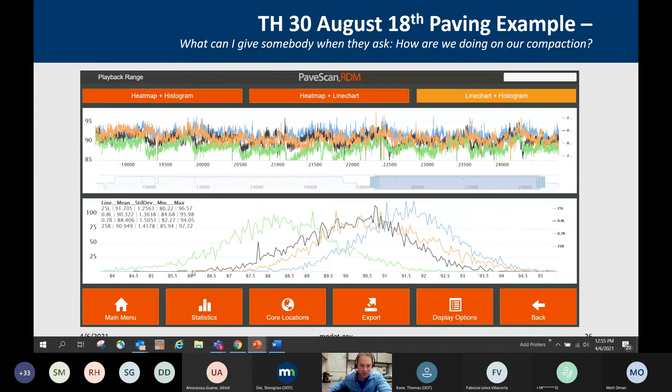Although I will say it is kind of interesting if you look at some of these deficient locations, it's a little bit informative to see some spots — I don't know if I exported one where it was almost like it was rubbleized in 2017. So in some cases, by seeing the 2017 image, you might have a little more insight about what's causing this deficient spot. But yeah, it's a good comment. I don't necessarily have an answer on how to accomplish that.

So maybe we can look at these design files. Maybe we can overlap under this design file. Yeah, that's another thing I should mention — we're exporting design files into Google Earth too.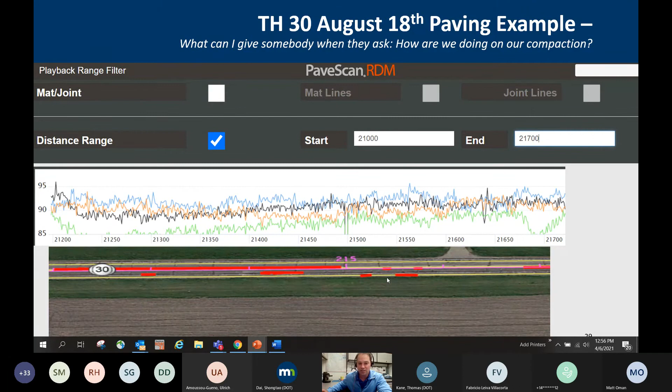That helps us when we're exporting these defect locations, because the pictures aren't actually geospatially all that accurate, so you shouldn't look at the pictures to say where you are within the lane. But these alignment files are very accurately created. So if you have these alignment files, you have a line exactly where the joint was supposed to be, as well as where the extents of both lanes are supposed to be, which is really nice because you can see this one corresponds directly to the shoulder edge deficiency, and this line corresponds directly to a center line joint.

So that kind of concludes the features that are either released in April or June as part of the software, but I also wanted to take this opportunity to talk to the group about what they'd like to see moving forward, and to generate a little bit of discussion. And I'll pass it to Dai here because he's got some ideas too.

And what's nice about this data set is you can really take this data that you can look at visually and see these sort of trends, where it's lower along the outside.

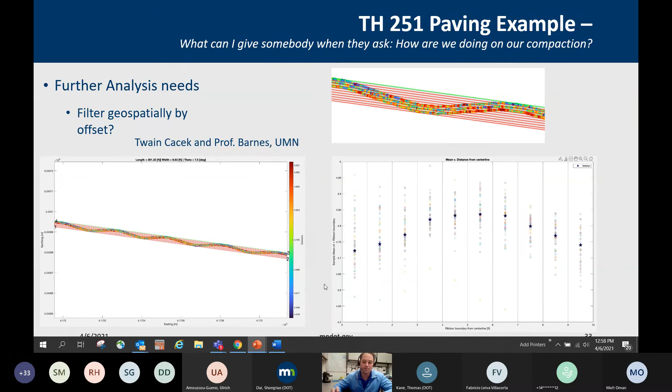Is there a recommended sampling frequency that can be set in RDM2? The default, I believe, is set at 1/2 of a foot, and I keep it at the default. One thing I'd mention is that everything you can change as a user doesn't actually affect the frequency that the data is collected. The only thing that changes the actual collection frequency is switching from walk to fast walk to vehicle mode, because that affects how often it collects. But if you change your frequency within the software, it's just affecting your display. So you should be in good shape either way, but I like to keep it at 1/2 foot for what I'm seeing in real time.

Related to that, in terms of processing large amounts of data, especially that 3-mile section I showed you, I changed it to 1 foot spacing for what you report, and then 3 foot spacing for the moving average. I found that to be a good way to have a happy medium between smoothing out the data, which you get with a larger moving average, and catching the local variations in asphalt compaction. The other factor is the larger your output interval, the quicker the analysis will be, so you could increase from a foot to maybe 5 feet if you want a more quick and dirty analysis of a very large station range.

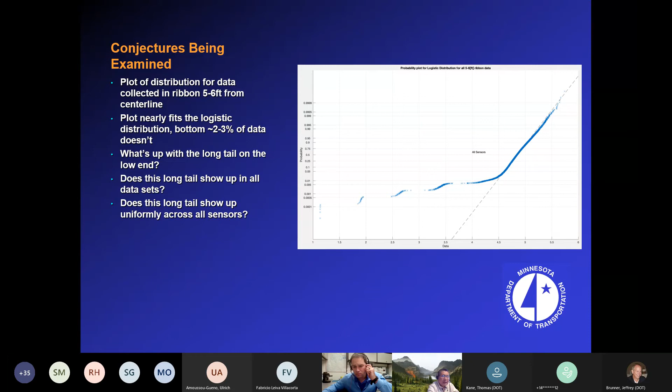If we put all 3 sensors' data together, but if you look at individual ones, sensor 173 is very close to the logistic distribution. It's a little bit deviated but not too much from this logistic distribution. Same thing for sensor 181, also close to this normal logistic distribution.

But if you look at sensor 171, all this long tail data at the low dielectric constant value all comes from this sensor 171, and this is something we do not understand yet. I would think maybe it's due to the sensor acting like this, or maybe the sensor is close to a joint, or maybe the sensor just did not work well, and another project maybe it's on and off, works well. So that's something we're looking at.

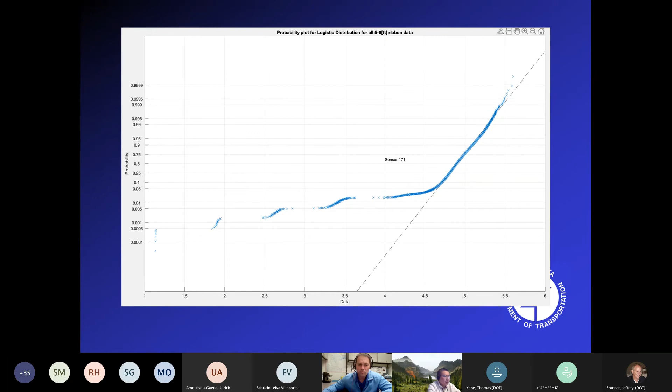How do we effectively identify some error data from sensors? So I just wanted to go through some ideas we're thinking to pursue further. I want to hear from you. Anything you want to include in this profile? Any inputs?

So I think to summarize some of the additional proposed improvements, the one I presented at the end was more geared towards being able to filter the data based on geospatial characteristics of it. And Dai presented an idea to look at the data statistically to make sure it's of quality. That would be something done on top of what we're doing with our quality assurance module, where if you throw the sensor data into this statistical model that Professor Barnes could create, it would give us an additional indication on whether or not there's an issue with our sensors.

Are there any other ideas, or do we just want time to chew on those ideas? And while you're thinking, I did see that Kevin Kliethermes had a comment.

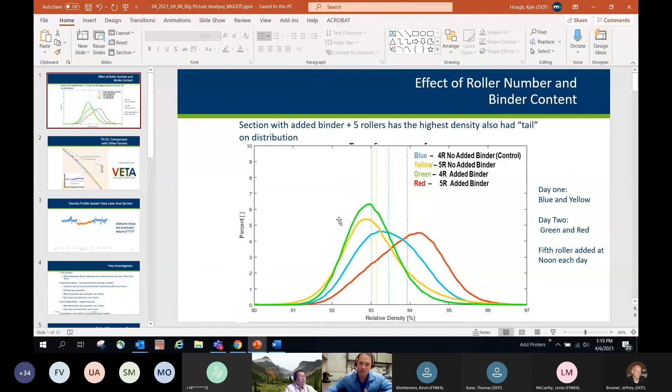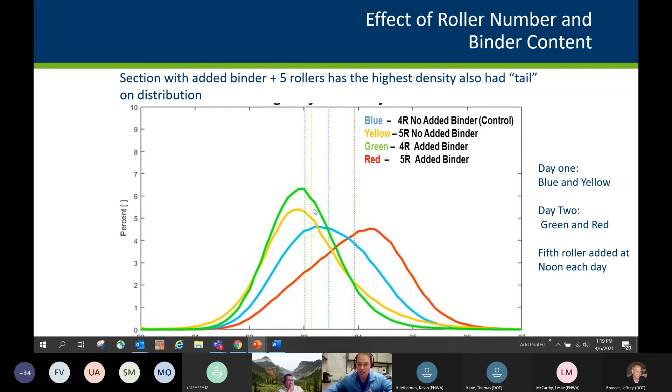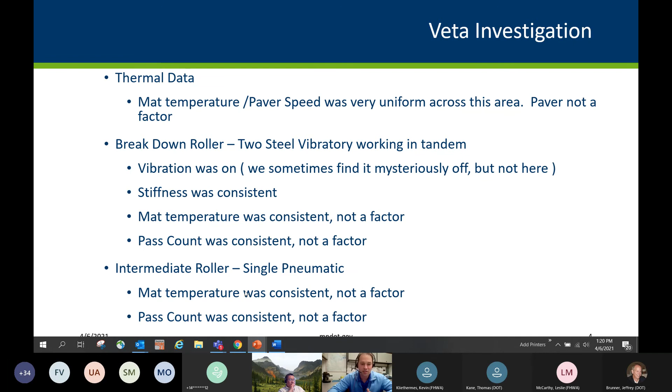What we're looking at here is specifically the mat, and what we're looking at is a shift where we had a local increase in dielectric. At that time we were just outputting dielectric, not a fully calibrated percent voids, when we added the fifth roller. However, that eventually dropped, and we never really explained why until Kurt started digging into the IC technology and didn't really see an immediate reason as to why we would have seen a drop like that. I'll spare you all the details to try to keep this on schedule here, but basically, through mining the data, we found out that there was a significantly lower mat temperature for rollers 4 and 5 in the area in question.

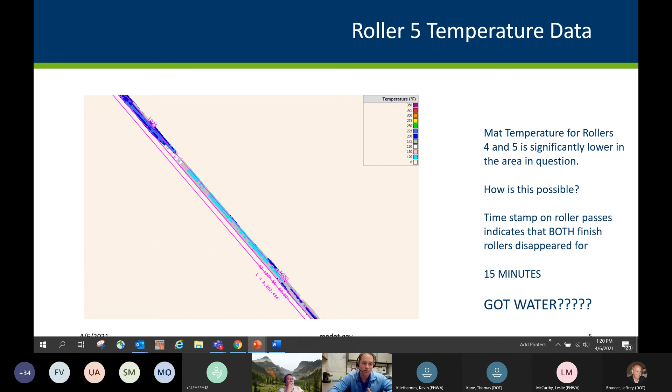And what happened over those 15 minutes was a water break. So that speaks to the importance of not just looking at one technology or another, but seeing how they fit together holistically when trying to stamp out these issues and identify construction-wise how we can get our best uniformity and high compaction of our placed asphalt pavement. This shows more details about that 15-minute water break that corresponded to the drop in density we saw with the DPS back in 2016, and then leading back up to the increase we saw when they added the roller initially.

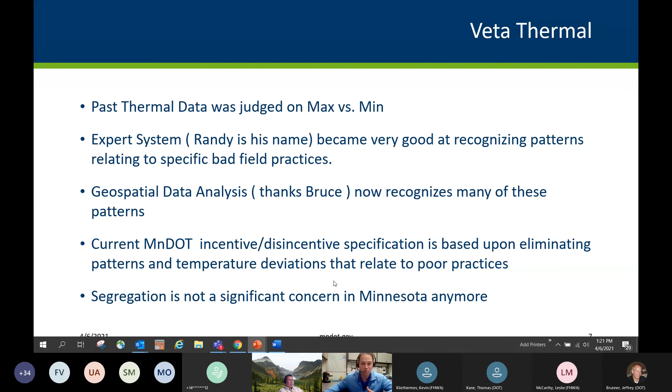Kurt wanted to touch on some of the stuff we're doing with thermal because it all ties in with the placed mat. They have pattern recognition to find poor construction based on thermal, as well as geospatial data analysis to recognize these patterns. My understanding is they're mostly based on geospatial uniformity, to the point where we now have incentives and disincentives based on limiting these poor practices as measured by the thermal.

He gave a couple of examples here. I think they're both highlighting what we're trying to do as an agency, which is eliminate poor practice. One of them showed that the breakdown roller was not keeping pace with the paver, and the contractor was instructed to fix the process. As a response, the contractor provided another roller and presumably improved the pavement. This type of information in the past wouldn't have been available to make that sort of improvement. Another problem everybody has is saturated stockpiles and segregation, and trying to get a thermally uniform mat.

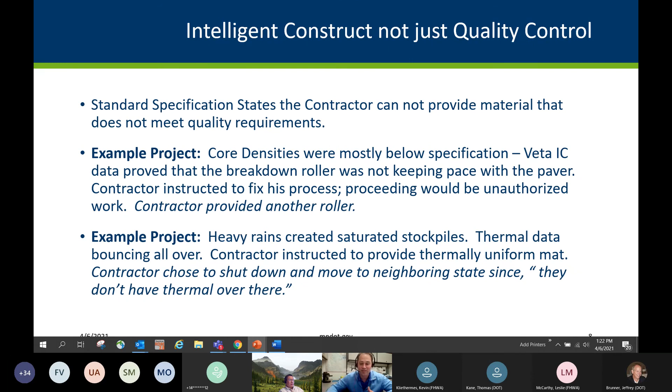And there was one case where they basically just decided to switch states because they don't have thermal over there, was the quote that Kurt gave.

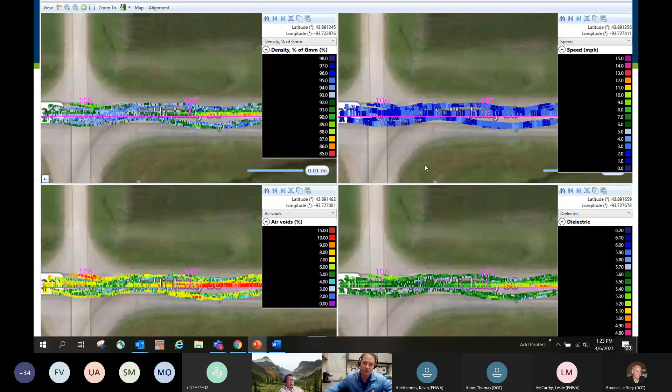This is some of what's going on right now with thermal and intelligent construction roller data. There's a lot of neat things within the Veta software to compare and analyze data with these technologies. And now we're just starting to be able to import, coming this June, dielectric data or DPS data into Veta. What you see here is some of the fields that the DPS data provides. Of course you have your air voids, dielectric, and density, but then you can also provide some arterial fields like the speed of the DPS. I could see signal quality and things of that nature being good to import into something like Veta, where we have a holistic view of all the different technologies.

Another thing Kurt showed here when evaluating this Veta technology with DPS data we provided: this is from that same Highway 30 project where we saw the low density around stations 111 and 112, and you see it here in Veta as well, but also the ability to overlay the core locations. So here's a 90.5% compaction core located at a spot where the DPS technology was indicating around 90.5% compaction. It's a pretty powerful tool that MnDOT is definitely invested in and uses extensively. I think we just wanted to share it with the other states, so you're aware of the power of this type of analysis suite, and discuss some of the needs moving forward.

So we're getting DPS data into Veta. The idea is to try to automate some of the more geospatial analysis that's going on with thermal currently, and do similar things with DPS. We'd like to be able to compare them to each other. I thought that might be of interest to all the different states, to say: the way I look at it, DPS tells you what's your resulting density profile, and then you can look at this other ICT technology to see what actually was going on that caused that problem, and really try to use this information to eliminate those problems before they occur.